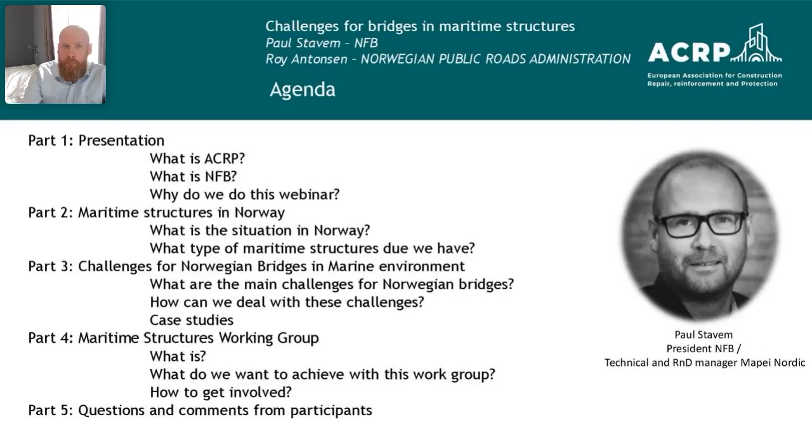So first I'm going to say some words about ACRP, which is hosting this webinar. This is a non-profit organization founded in 2020. The focus is on activities based on repair, reinforcement, and protection of all kinds of structures and buildings made of different materials, both steel and concrete, with quite close cooperation between national associations to share activities and to learn.

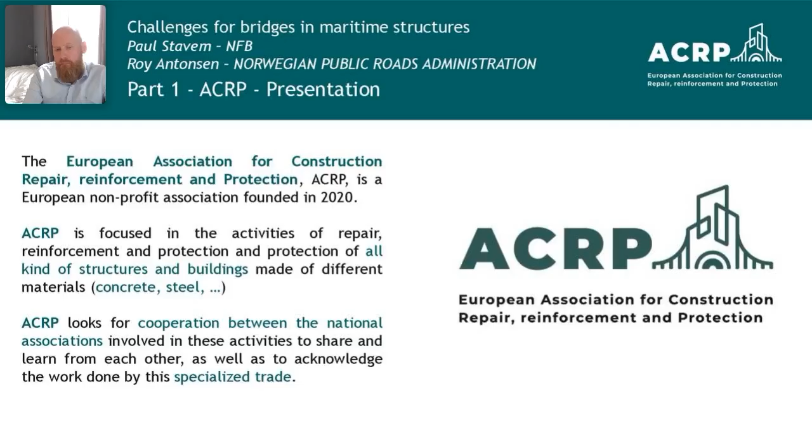The mission for ACRP is to promote the maintenance of constructions in Europe and to create a European network of professionals and information, including all national associations, but also companies like contractors, manufacturers, engineers, asset owners, and public administrations, and to try to develop the best practice, the regulations, and the trainings needed in order to have good sustainability of the structures we have.

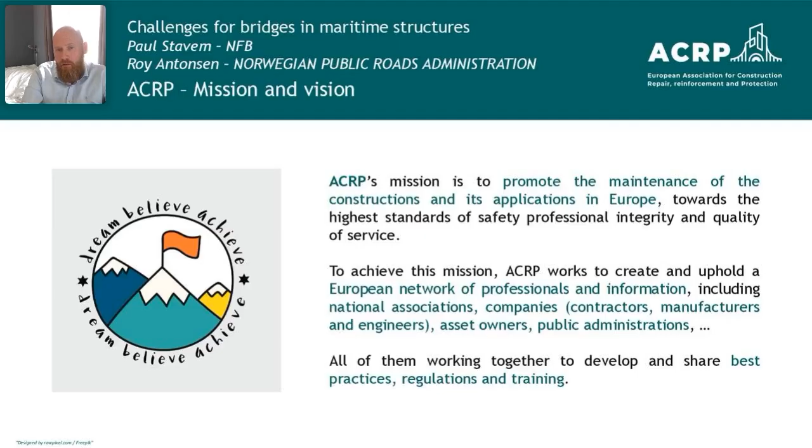So one of the goals for doing this is, of course, to alert to the importance of maintenance from a general point of view, to set up and promote European standards, to promote the maintenance of constructions with both knowledge and expertise on how to inspect, project, and execute the maintenance, and to try to work within the legislation on regular inspections, qualification on projects, quality control of the systems that are installed, and to try to exchange techniques, working methods, and trainings.

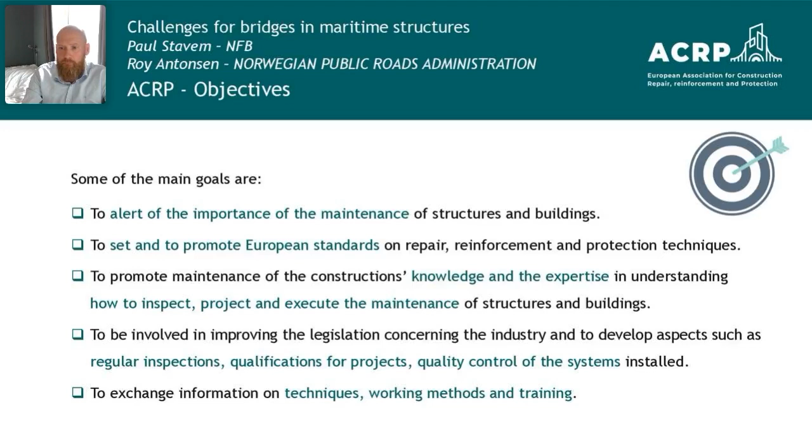ACRP is an open association where both national associations can be members, as well as contractors, engineers, and suppliers, and basically all entities involved in this type of specialized activities.

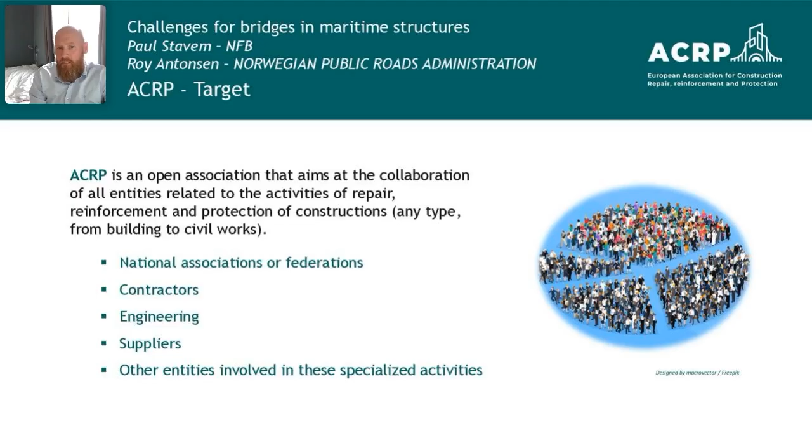The first step of this association was done in 2016 by a common interest from the associations STRRES from France and ARPHO from Spain, leading to a joint meeting in Paris in 2019 with 6 countries involved, and then to the establishment of the association in 2020.

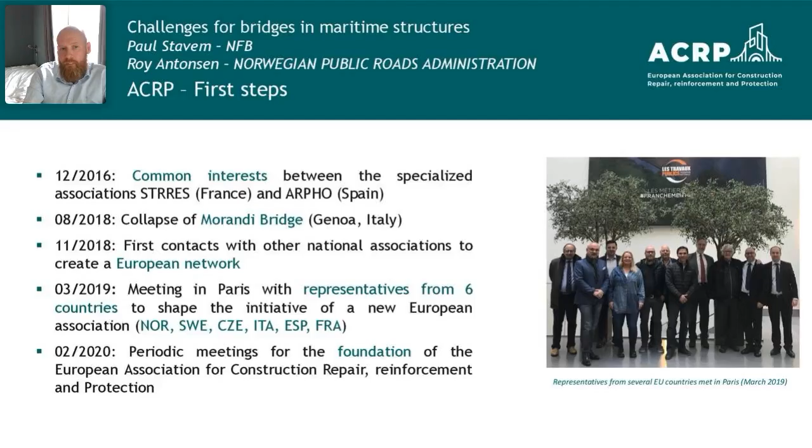The important thing for this association is to address some key points: the importance of maintenance, that maintenance is a part of the life cycle and not a problem, that there is limited knowledge and expertise in this area, and that repair, reinforcement, and protection go together, requiring a network working together.

You need a network working together with inspection, project, product, and execution, and you need to have standards, regulation, and commitment. For the general public it's unknown, and there's basically a need for specialists.

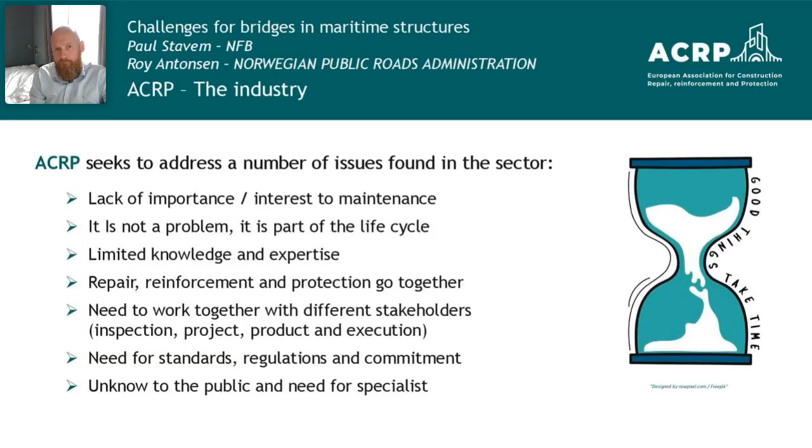My background and the reason for sitting here today is that I'm the president of the Norwegian Association for Concrete Repair. This is a similar association in Norway, established in 1990, now holding about 60 different member companies, representing owners, builders, technical consultants, suppliers, and applicators, and also some personal members.

One of the key aspects of this association has always been that the board should be elected in a way that represents all parts of the industry, both suppliers and technical consultants and engineers, but also the owners of the constructions, basically representing the whole business.

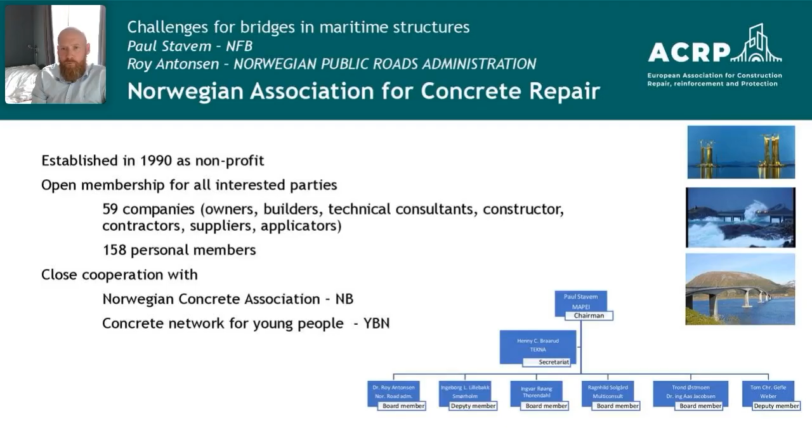There is also quite good cooperation with the Norwegian Concrete Association and a network for young people. The main activity of this association has been to arrange a meeting place for all interested parties in this specialized application area.

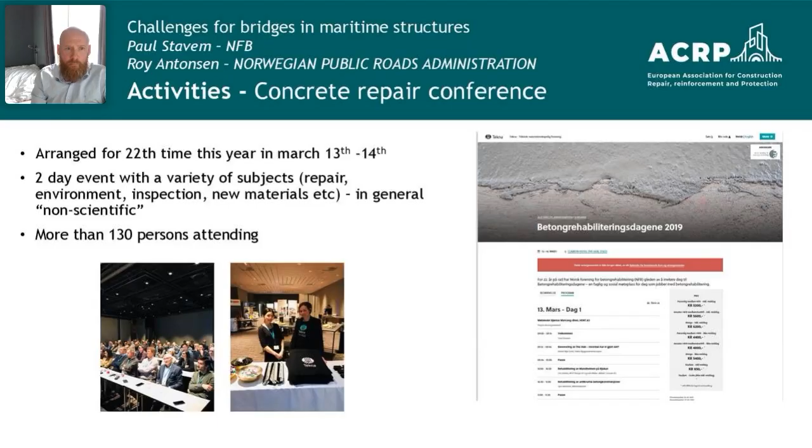One of these is a conference held every year, typically 2 days, with a high focus on different subjects like repair, environment, inspection, and new materials, generally organized in a non-scientific way, with approximately 130 people attending every year. The second important part of this association has been arranging training courses.

One of these is called R for Repair, a 5-day training covering national regulation with safety, calculation, environment, and the EN 1504 series, with an exam. Combined with training in concrete technology, this gives documented competence to perform repair and protection of concrete structures. It is arranged about 2 to 3 times a year with approximately 60 to 120 people attending.

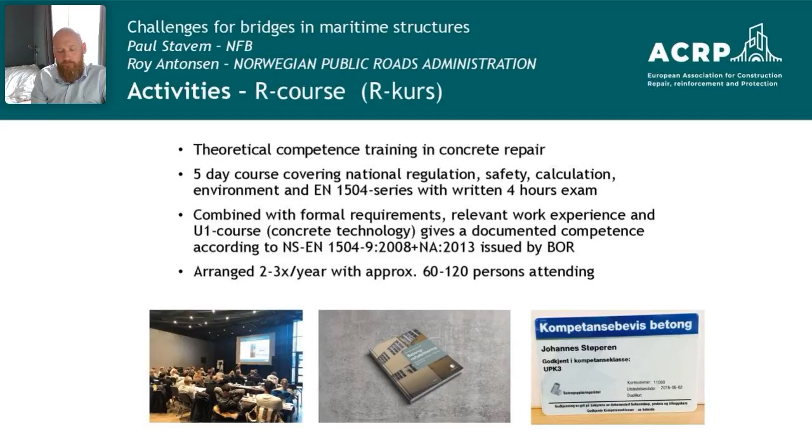The third activity is the guidelines, and this is also quite important in order to get the written best practice and be able to use this for new projects. This is a total series of about 40 different guidelines based on local conditions, experience, and regulations, typically working on areas like FRP strengthening of concrete structures, with resin-based coating, surface treatment systems, guidelines for inspections, and guidelines for instrumentation and surveillance of concrete structures. Basically trying to put together something that is best practice and state-of-the-art for this market.

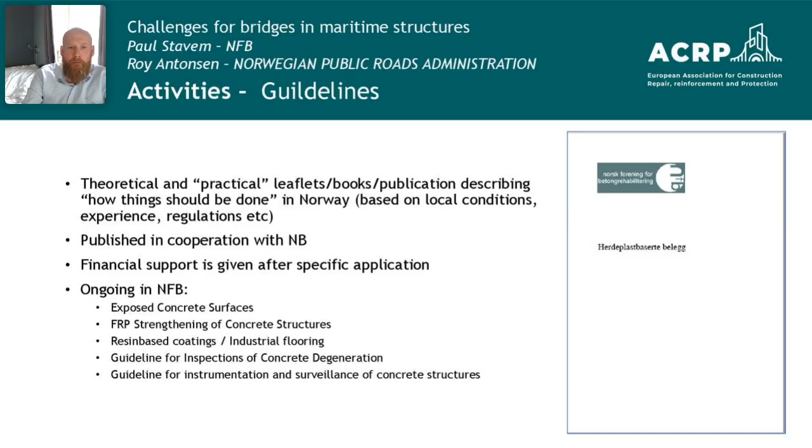That is a short summary of what the Norwegian Association for Concrete Repair is doing. And as a way of introducing the topic of the day, I'll say something about marine structures in Norway.

Some facts about Norway: we have a population of about 5.3 million people. That's not a really big country in that term. The area is about 385,000 square kilometers, which is about the same size as Germany if you compare. So it's a quite less populated country.

What has been important in Norway is the coastline, which in total is about 101,000 kilometers. This is actually the second longest coastline in the world, only beaten by Canada. This coastline has been, for many hundreds and maybe thousands of years, very important for different industries. I'll give you examples from the oil and gas industry, transport, and also fish industry.

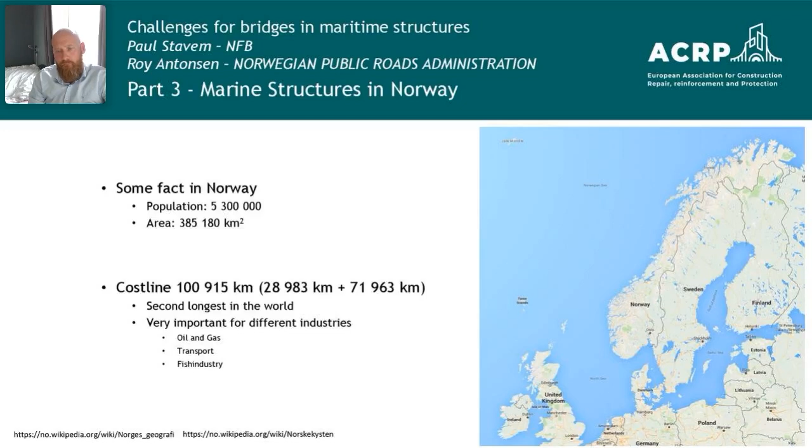Oil and gas is an industry that started in the North Sea around 1970 and resulted in the building of some quite large concrete structures from 1975 to 1995. In total, 15 were built, called Condeep. If you look at the picture here, you'll see a bit of how this is made and its size.

These typical structures—if you take Troll A from 1995 as an example—are about 1.1 million tons in weight. The height is about 472 meters, and they are placed at a depth of 303 meters.

What's a little special about this, in terms of protection and maintenance, is that it was built with a strategic repair and maintenance philosophy: designing concrete with a very low water-to-cement ratio, increased concrete cover, and also, as you see in the photo, using protective coatings in order to protect it. The obvious reason for doing this is clear when you look at the photo of how to do the repair—you need to do this by basically climbing, and of course the cost and difficulty of doing this is quite significant.

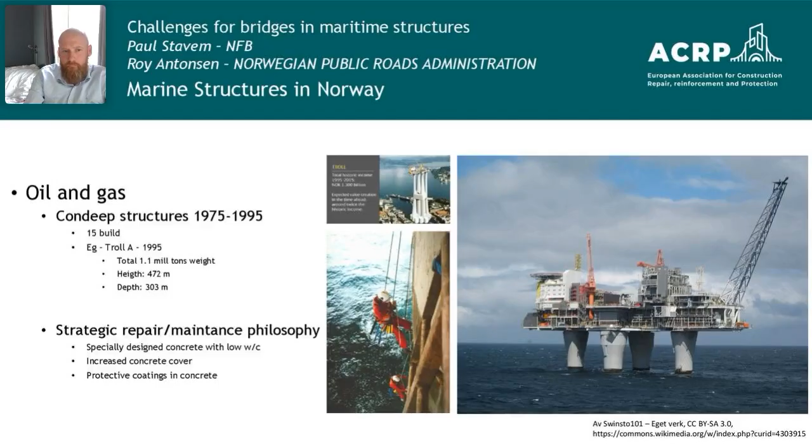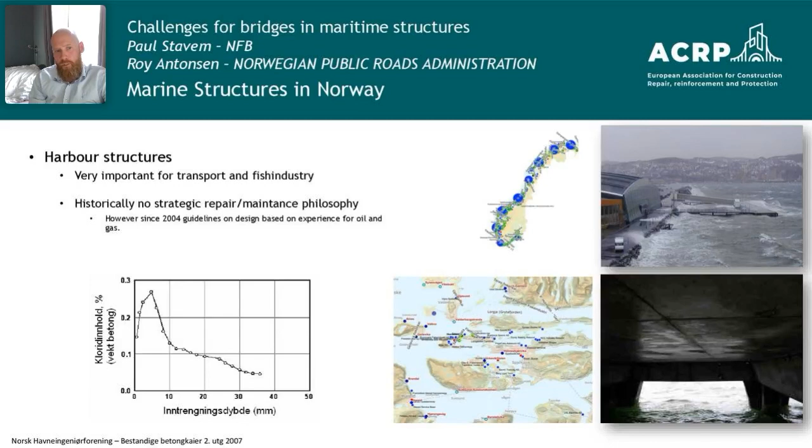The third type of structures are the bridge structures, which Dr. Antonsen will talk about in just a few minutes. Like the others, these are quite obviously important for transport and the fish industry. For this part, the Norwegian Road Administration has done enormous work to investigate the bridges and understand both the mechanism and the exposure. There are a lot of reports actually showing the microclimate and exposure on the bridges compared to the exposure of the sea.

And I think for this one, I'll give the word over to Dr. Roy Antonsen, who will speak about the bridges in Norway.

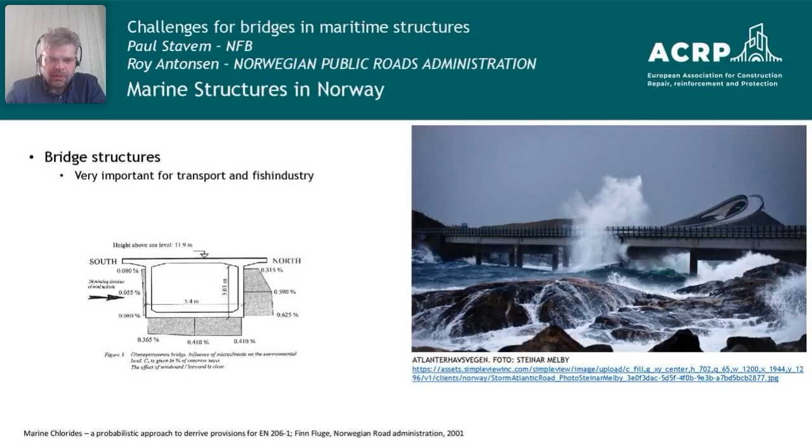As Paul mentioned, I work in the Norwegian Public Roads Administration, and I work within a department where my colleagues and I are very much hands-on.

We go into each of our projects starting from assessment of the bridge's condition, and we describe how to repair these bridges, either by concrete repairs or cathodic protection. Damage can come from alkali-silica reactions and so on. We describe how the rehabilitation will be done, follow up through the whole construction period, and finish the projects with documentation. Sometimes we also follow the rehabilitations afterward to document the lifetime of the repairs and how to improve future repairs. So we are a team working very much hands-on.

Some of these slides that I made today contain a lot of details. We won't have time to go into all of them, but I've included the slides anyway, because people in the audience sometimes like to look at them after the session is over, and there will be details giving more information.

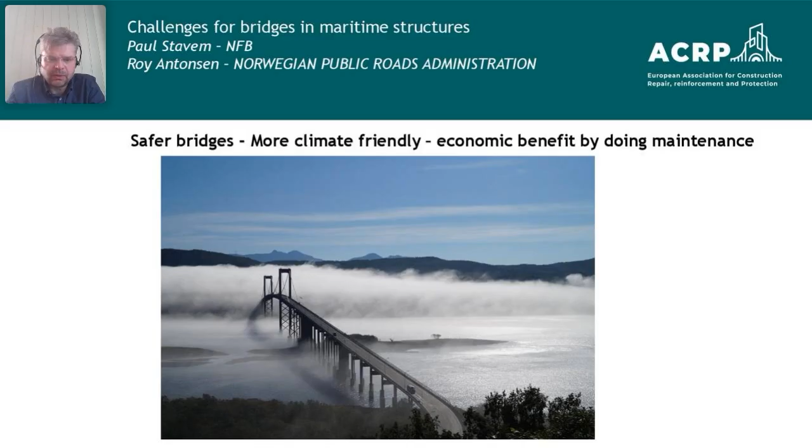Let me start to talk about safety. This one seems very tough - I'm saying straight out that our inspections are not good enough.

Normally in Norway we have very good routines for doing main inspections and documenting the safety of our bridges. But there is one thing we were never good at: investigating corrosion within post-tensioning tendons. Sometimes there will be voids inside the ducts where these post-tension cables are, and we are not very good at examining and documenting this. I will show you a good example of this further in the presentation.

About cost, I'm saying that we save billions by doing maintenance and rehabilitation of concrete bridges. Why? Because in the 60s, 70s, and 80s, a lot of bridges were built in Norway using other concrete standards and other methods than we have today. The concrete standards back then were not very good, and the concrete cover was typically only 20 to 30 millimeters, built in Arctic coastal environments. Of course, there were chloride ingresses.

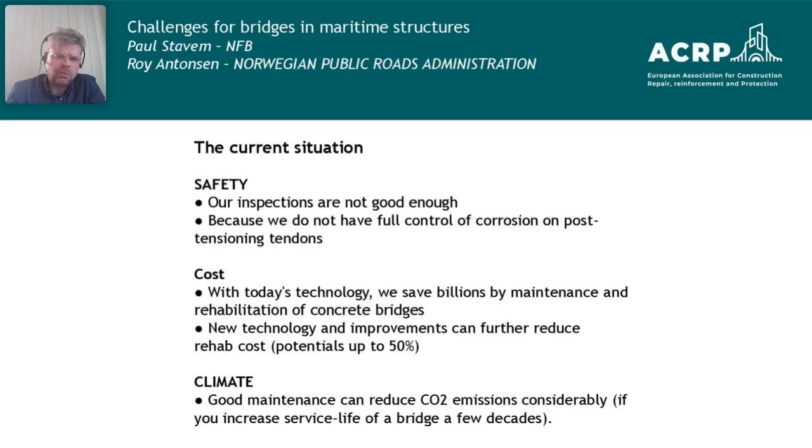Because there are so many of these bridges built with a poorer standard than today, it's very important to rehabilitate them and keep them alive, because building new cross sections or replacing them with new bridges would be very expensive. And it's not only about money - it's also about the climatic gas emissions from producing cement, transport processes, and all these things. So rehabilitation is extremely important in Norway for concrete and steel bridges.

So I will go on and talk about safety. This special bridge, Herøysund Bridge, I thought in the beginning was going to be a simple project, because I designed a cathodic protection system for this bridge based on conductive painting. The bridge was 100% utilized - you can drive a 50-tonner over this bridge, but that's also the limit. Its load carrying capacity is 50 tons, and it was 100% utilized. So I designed a CP system based on conductive paint because it's not heavy.

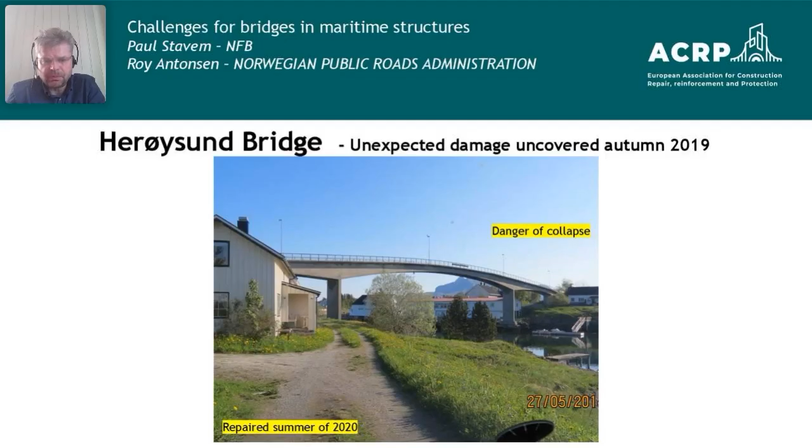So we were going to rehabilitate this bridge, but during the autumn of 2019 we got a surprise. Now I'm going to show you that surprise.

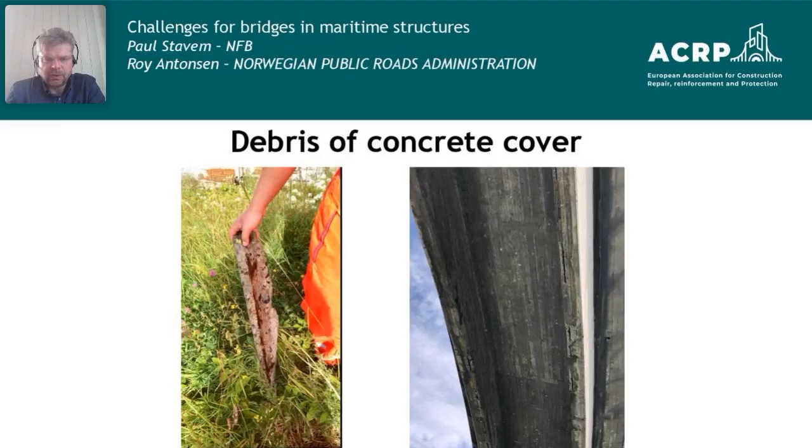Let me just repeat - the purpose was to install cathodic protection and also repair the concrete cover because of falling debris. Here is an example of that: about 10 kilos of concrete debris from this concrete cover spalling, loosening, and falling down into the grass where people are walking under the bridge. Very dangerous, so we had to repair this bridge.

But here is our surprise: once we started doing surface treatment of the bridge, because we were going to apply the conductive paint...

It's very normal that we find delamination on coastal bridges in Norway because of macrocell corrosion. But what happened here we never saw before: about 100 kilos of concrete just fell out from one of the beams in the bridge, revealing a steel box which is actually the anchors of the post-tension tendons, jointed inside this steel box. I think this box is called a coupler in English, and it was totally revealed because of the concrete falling out.

We went to see this immediately as it happened, and because we have a lot of routine inspecting damages on bridges, we could see that this delamination didn't occur recently. It has been there since the bridge was built. The surfaces here are dark and carbonated, and this is old concrete surface.

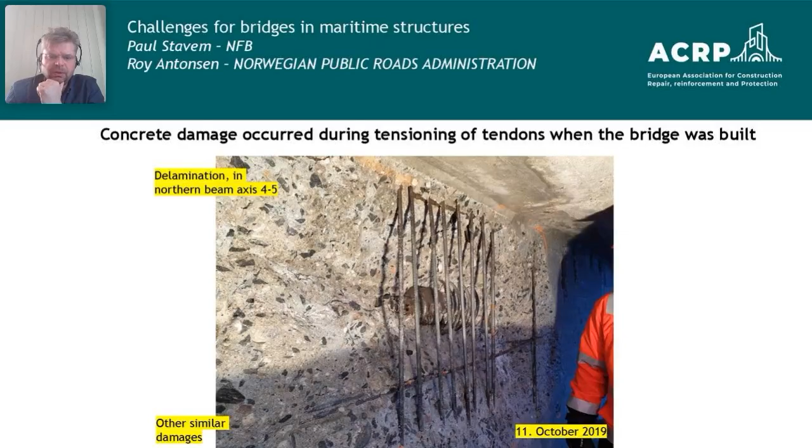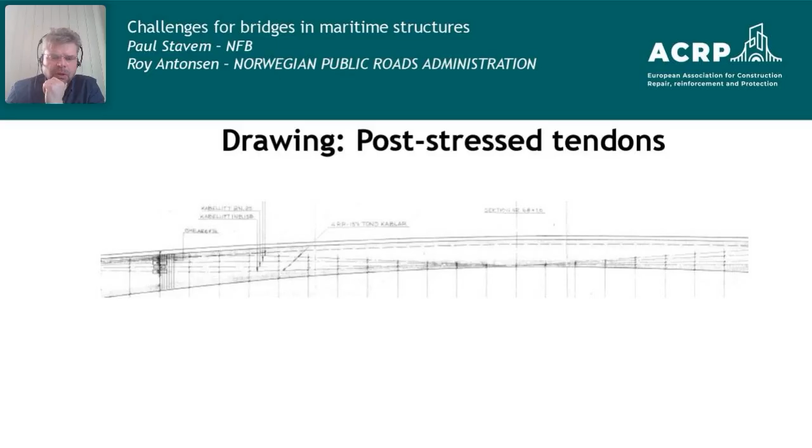As I'll also mention, this bridge looks like a cantilever bridge, but it's not - it was actually built on formworks in 1966.

Also important to notify you that MOWI, which is a salmon producer in Norway, has a very large salmon farm by the bridge, and they do about 40 crossings of heavy traffic every day, transporting fresh salmon out to the world, exporting it. So this bridge has a key function for the infrastructure in this society - this is on the coast of North Norway.

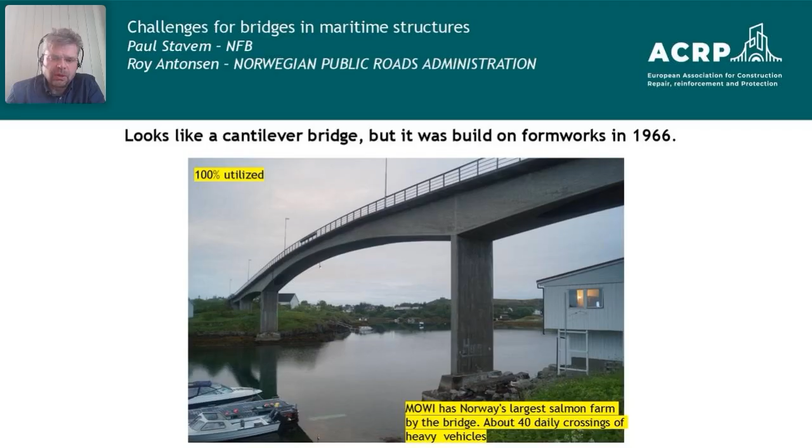A key factor there, and it was very important for us to examine immediately these non-grouted ducts we found. Here's the fiber optical analysis, within that steel box I showed you, that was not grouted. This fiber optical inspection showed first only surface rust on the steel wires, but it gave us the first concerns that maybe there are other places inside this bridge where we have voids, empty spaces, and corrosion of the tendons.

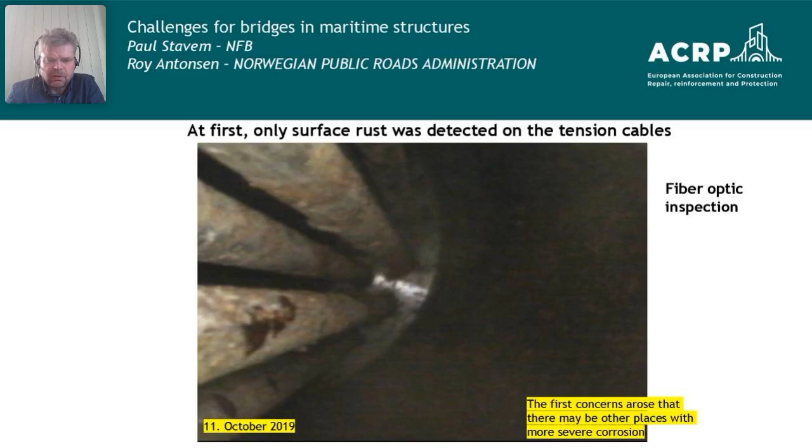It's hard to inspect these tendons - I'll show you later, here's another one. You can see the ducts, and the tendons are inside the ducts that are pre-stressed. It's hard to inspect them because these are metallic ducts, and there are only a few methods available which are non-destructive to inspect such voids.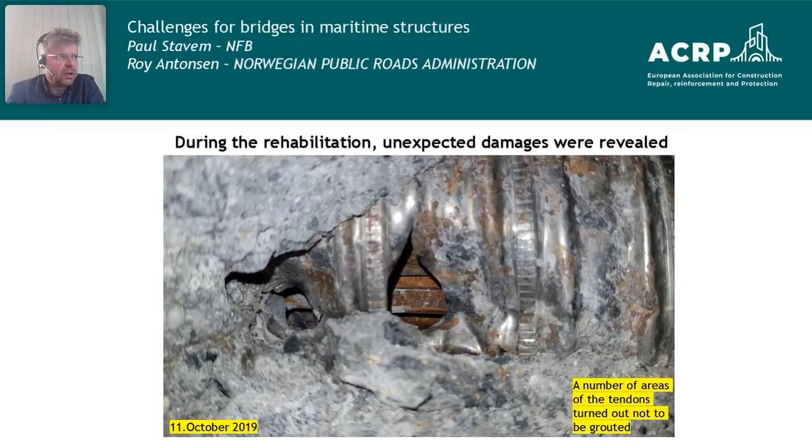As we went along in the project, we found more and more of these voids, and we had to change our plans. It was no longer as we had considered - we had to stop our plans about installing cathodic protection, and rather think about strengthening the bridge.

The case is that we found more and more severe damages - as you can see here, this is severe corrosion, gravrust as we call it in Norway. You can also see that the tendons here are partly enclosed by a very humid mass, which has been analyzed in laboratory, and it's a mixture of partially injected grouting, cementitious mass that has frozen over the years, and very small particles.

We only found small traces of chloride and sulfate inside here. But this void you're looking into, we have removed the duct here. So originally this happened inside a closed duct, and there was enough humidity there to sustain corrosion, and enough air also. The corrosion mechanisms happening inside these ducts are completely different than the ones we're used to on coastal bridges, where you have chloride-induced macrocell corrosion. These are completely different corrosion mechanisms occurring inside there.

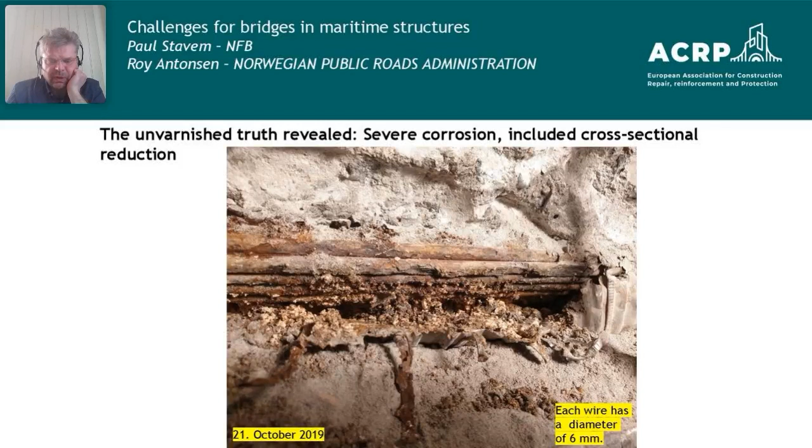We now have a collaboration with the university in Trondheim, and we have master theses being written on these corrosion mechanisms as I'm speaking now.

So let's go on. Here is the area that has been cleaned from all corrosion deposits, and you can see that the cross-section reduction of these steel wires is about one-third.

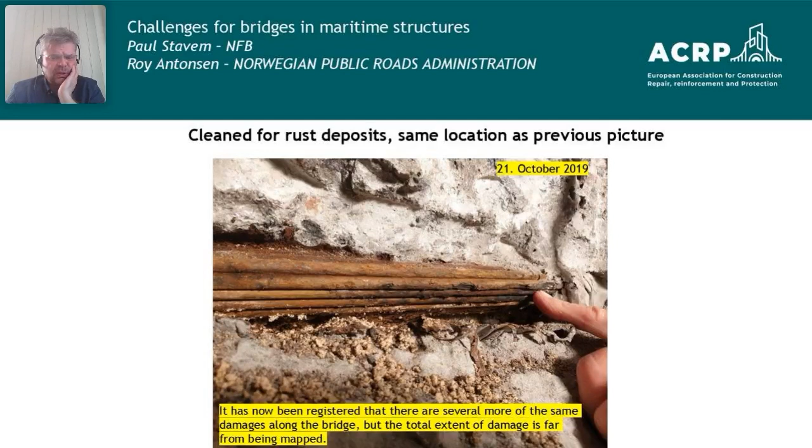And of course, we started getting afraid. Why should we think that this is the third or fourth place we opened the bridge, and that we found the worst place? We knew there had to be places even worse. So we kept going in the project.

Found this one too. And because the bridge was 100% utilized, we became worried, because there is actually no reduction margin left on the cross sections of the tendons, and no margin for lack of interaction between the tension cables and the concrete either.

So this group of specialists that was appointed there had a hard time doing the calculations, verifying that we were still within the safety margin on this bridge.

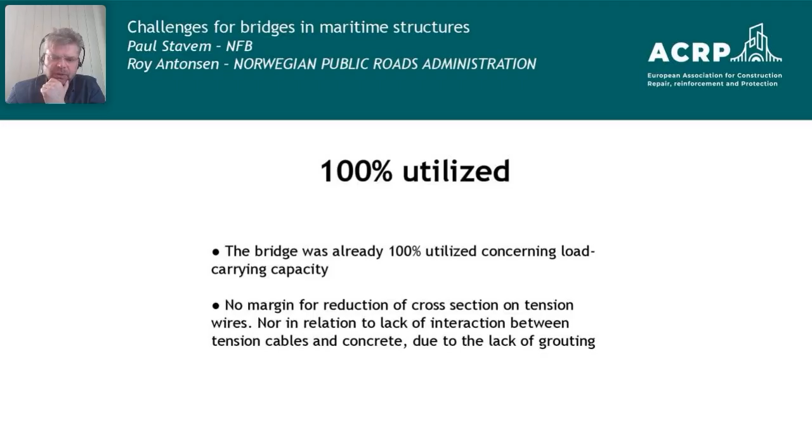So the static calculation showed that the bridge had to be strengthened, had to be monitored, and the remaining lifetime was only set to 3 years.

And then Nordland County, which owns the bridge, now had to build a new bridge. This time the Norwegian Public Roads Administration was too late with the rehabilitation, because our inspection routines were not good enough. It's usual that we are a bit late rehabilitating bridges, but that's usually because of lack of funding. This time it was because our inspection routines were not good enough.

Notice also that the price tag for a new bridge is 220 million NOK, while the rehabilitation project had a budget of 13 million, and this is usual. We normally enhance the lifetime of bridges by about 30 years when we go in and do full repairs of them, usually for a price tag that's just about 10% of the investment cost for building a new crossing. Just 10% to increase the lifetime by several decades - very interesting because of the economic benefit of doing rehabilitation.

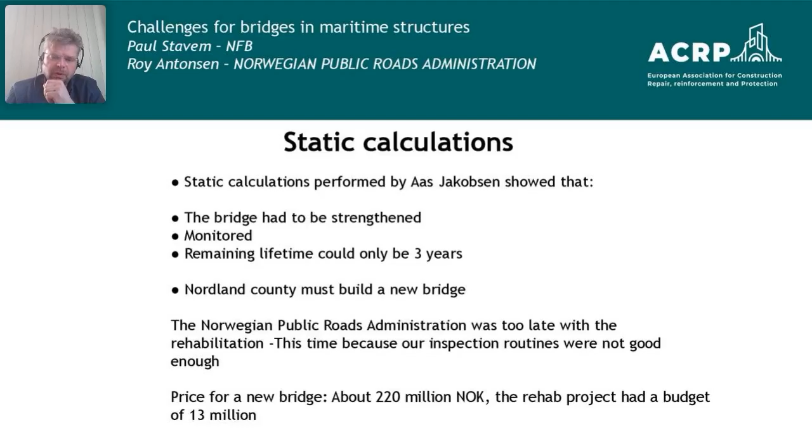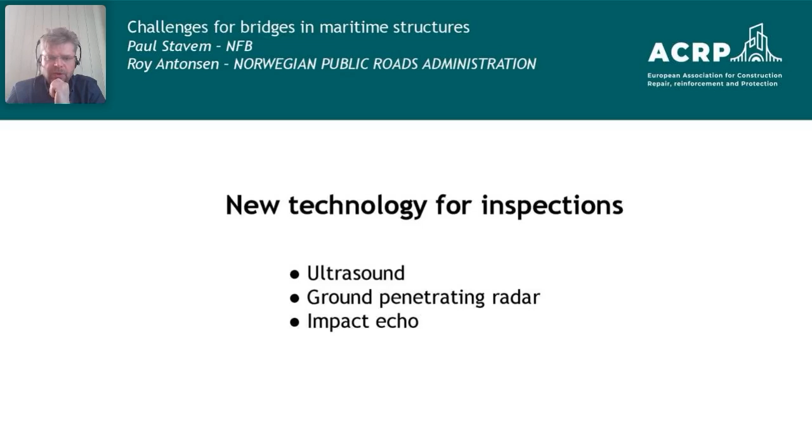So let me talk about the inspection methods. We have ultrasound, ground penetrating radar, and impact echo. These three combined are good to detect voids inside concrete ducts.

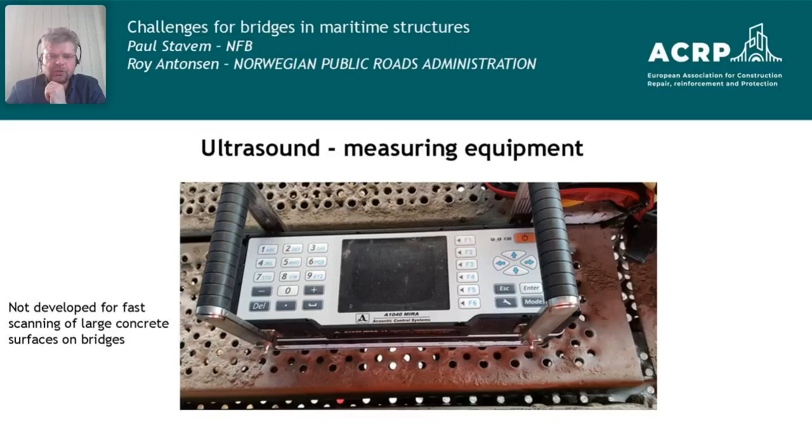And here's an example of ultrasound measuring equipment. This one here is not. There are some units now that you can get that scan the surfaces, but not combined with ground penetrating radar and ultrasonic together - but you have this scanning equipment available now.

We have got the funding in Statens Vegvesen, the Norwegian Public Roads Administration, to carry on a project called VESPA. We have the funding now to help develop this kind of equipment, and also to map a lot of other bridges in Norway, and to establish the routines necessary for inspecting these voids.

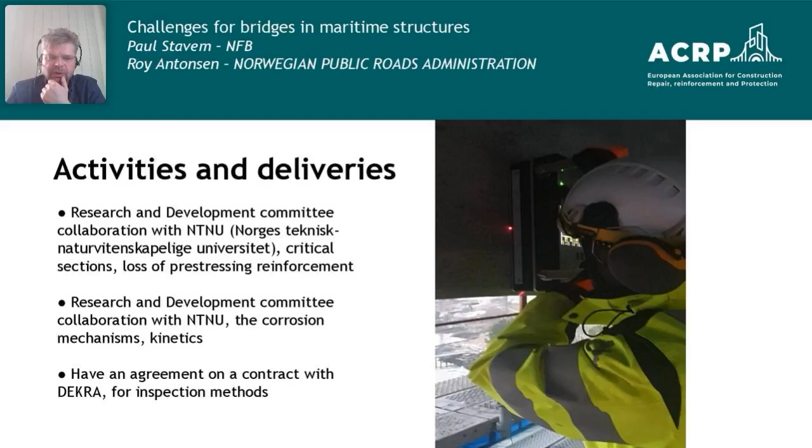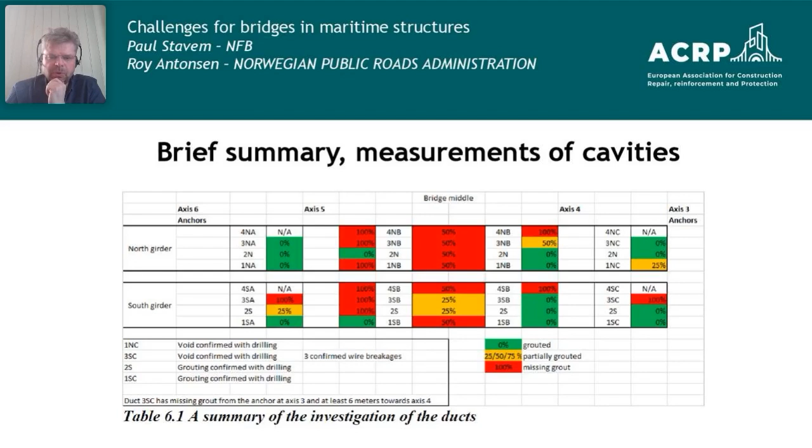So it's easy to do, we have the equipment, but it's not easy, it's very tedious to do this examination. Only these measurements here took a whole week of work. And I'm not talking about a normal working day, I'm talking about 12-hour working days for a whole week to get these results. It took a long time also to analyze the results.

But they were verified, as I will show you later. The conclusion from this work is that the measurements combining ultrasound, ground penetrating radar, and impact echo together are suitable for locating cavities in the ducts. The methods need to be developed for faster scanning of larger surfaces, and all the measurements in the critical section showed varying amounts of cavities in Herøysund Bridge.

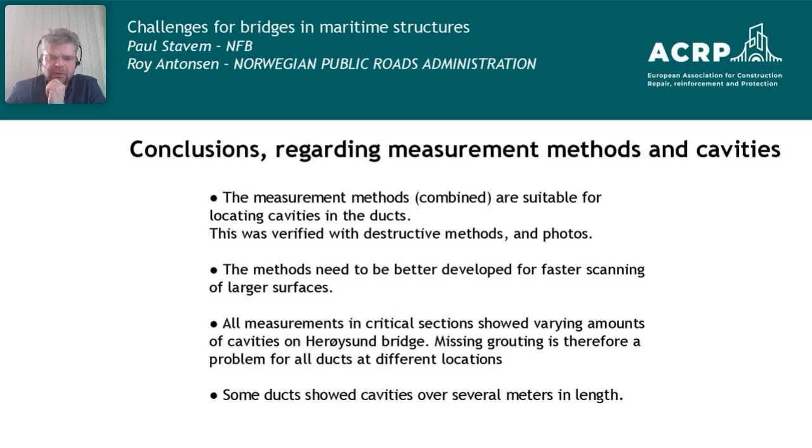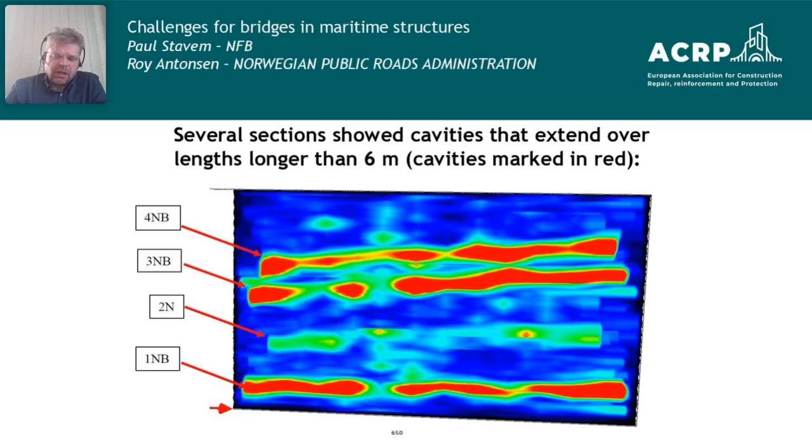Some ducts showed cavities over several meters in length, as this one. This is 6 meters in length here, and you can see that the red areas are totally voids. Very scary results we found there, and therefore when we verified the results, we actually took a 32mm drill.

We drilled straight right onto the tendons. We would never do this because we're always afraid of damaging the tendons, but this time we had to verify our measurement results. As you can see here, this is like a red zone of ours - we measured the ultrasound and all these things saying it was empty, and it was empty. So we verified the measurement methods, and notice also that we did not damage the tendons inside. There's a lot of corrosion in there, and therefore we verified our suspicions on the voids there.

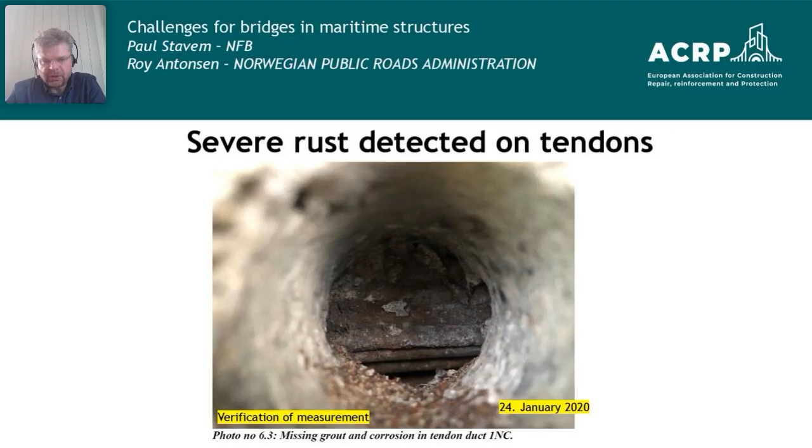Remember that these are post-tensioned tendons, right? So there's a lot of force on each of these steel wires. You cannot move them. But what we did here is put a screwdriver in there - you cannot see the screwdriver, but we applied some force on these steel wires. We wanted to see if we could move them, because we were afraid that there were some fractures on them due to corrosion. Now, Anita, you can start the video.

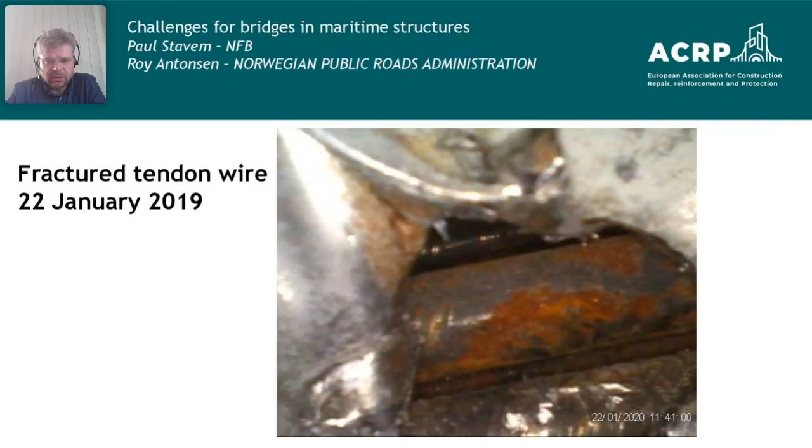And this is what happened. So this one here is broken. Yeah, you just know it's broken. So notice also there are no non-destructive methods for mapping the extent of corrosion inside. We can measure the voids, right, but not the corrosion.

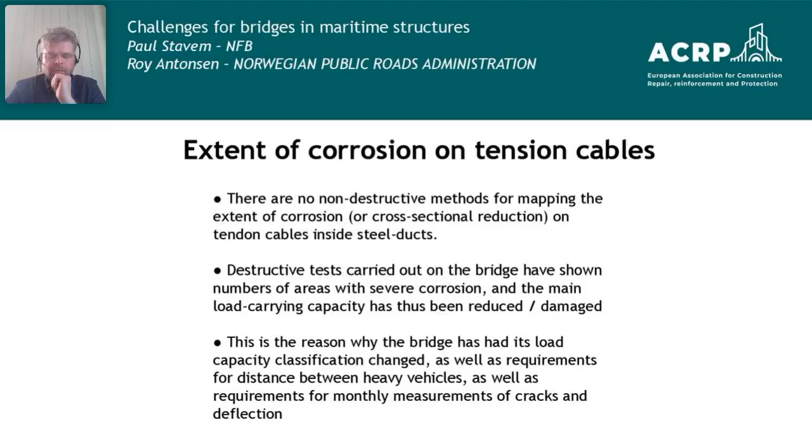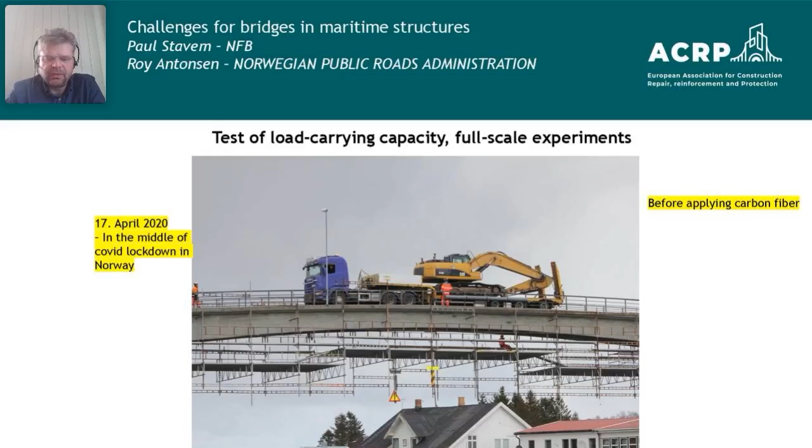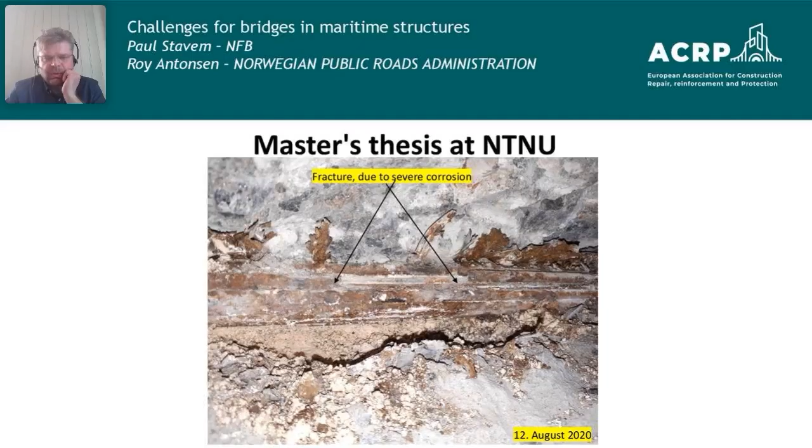So we were within the safety margins, but because of the corrosion there, we decided - here you can also see we found later the corrosion cracks, or actually the threads have been totally corroded away. These are scary photos, but still we were within the safety margin of the bridge, deciding anyway to strengthen it. So here's the carbon fibers that were applied, and for those interested, you can see the details on the design of the strengthening systems.

I will just show you how we applied the carbon fibers under the beams here. It was glued on with epoxy. So this is a safety precaution for the remaining 3 years of the bridge, but the Nordland County still has to build a new bridge here because of the ongoing corrosion in the main carrying system of the bridge.

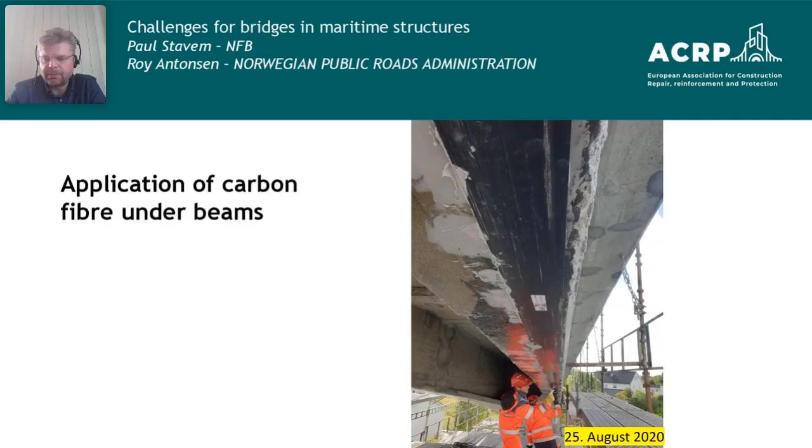So what needs to be done now? The project I mentioned that got financing from the Public Roads Administration - what we will do is try to help the market develop these measurement methods. We have set a time frame of 2 to 3 years on this project. You need to map a lot of bridges and set some priorities. Luckily in the UK they have done a lot of work on this before - there's a good standard, a UK standard, showing how to help prioritize when you own a lot of bridges, to assess these structures and give you a priority list on where to start.

We estimate that we have to do condition surveys on like 300 bridges over the next 10 years, with respect to cavities in the ducts. And of course, when the Herøysund Bridge is demolished in 3 years, we would like to open further places and study the corrosion inside there. We need to understand the mechanisms.

For those of you working with electrochemistry, you saw that the tendons were partly enclosed by this humid mass. You would also know that there are different options on how corrosion can occur when only partly enclosed by a mass like this, in humid mass.

We also have some suspicions that there might be corrosion due to what's called, not embrittlement, but spänningskorrosion - I will say that in Norwegian. I'll come back to that. So we need to keep doing static calculations and check if it's possible to repair these kinds of damages.

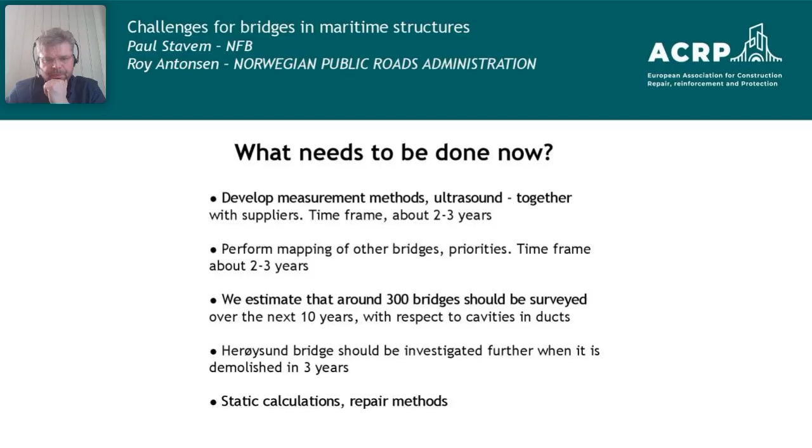I will talk a bit about cost also.

Now we go straight to cathodic protection, and this is Sortland Bridge in the north, also in Norway. I usually refer to this one as the crown jewel of cathodic protection in Norway, because it was the first bridge being rehabilitated by this method. At that time, they did a lot of right things - they were actually excellent. The white fields on each of these pillars are cathodic protection by a titanium mesh and sprayed mortar.

This CP system is soon 30 years old, still running, and the values are very good. The only thing we have started losing is the reference electrodes - they are near the end of their lifetime now. We are going to put in new reference electrodes and keep on running.

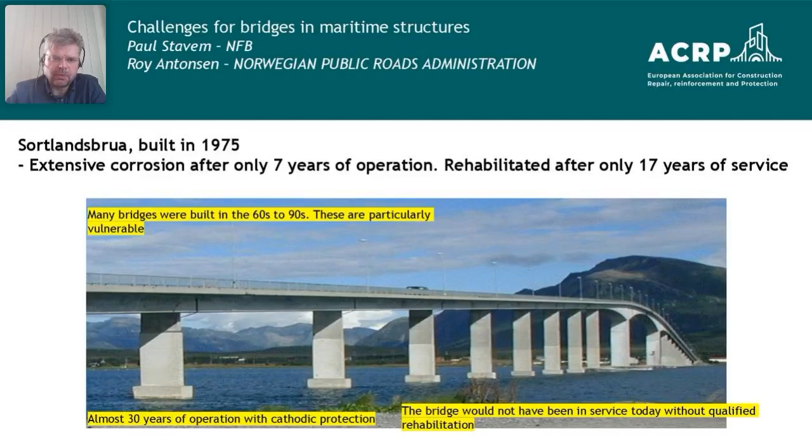This CP project has been astonishingly successful. There was a lot of corrosion damage on Sortland Bridge, and only after 7 years of operation - we can clearly say today that this bridge would not exist without being cathodically protected. It would not be there. So this is a 30-year-old project.

Now I'm going to show you a new one. This is Breisundet Bridge in Lofoten. I suppose a lot of you in the audience have heard about Lofoten - it's a pearl of nature in the north, and a lot of tourists visit this area every year. We finished rehabilitating this bridge in 2017, completely new and modern cathodic protection system. We are very proud of this one.

The reason I show it here is that we calculated this one, Breisundet Bridge, and its sister bridge, completely the same design, just 100 meters away. These two bridges we rehabilitated for like 50 million NOK, and it was also estimated at that time that building a new crossing there would be 10 times higher. So we stayed within 10% of the investment cost of building new crossings. We take care of these old concrete bridges - this one was built in '82.

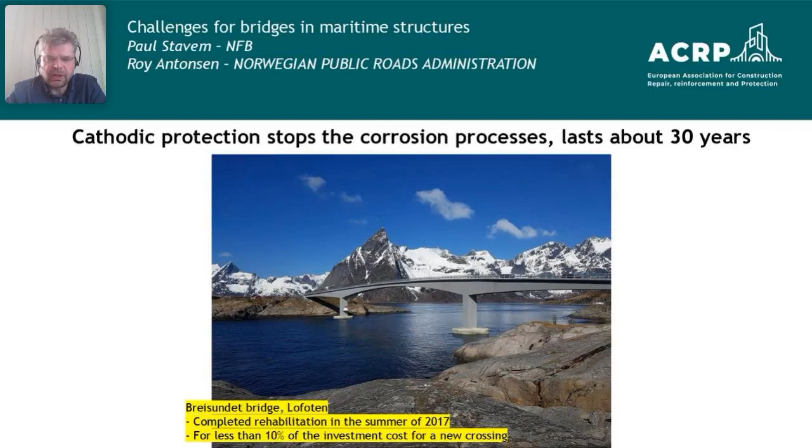And then we have Måløy Bridge here, which is the biggest cathodic protection system in Norway - we have like 23,000 square meters of cathodic protection installed here. This project will finish this summer. It's also a good example that we are able to protect these bridges and take care of them, even though they were built with bad concrete standards in the 60s, 70s, and 80s. It's totally possible to maintain them for decades.

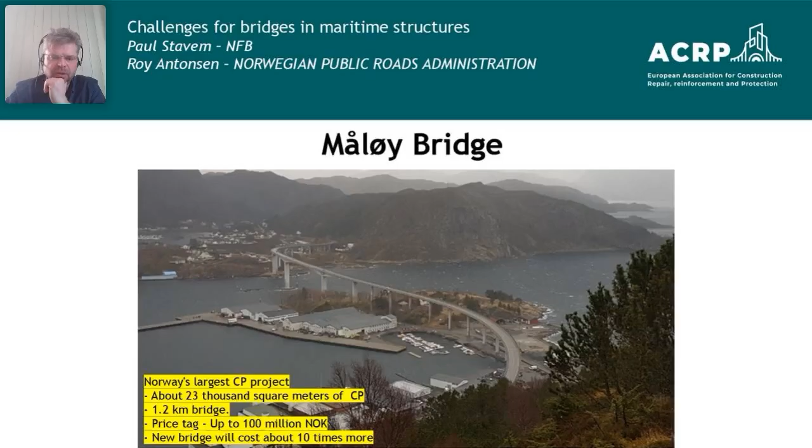I mentioned also that there is some new technology on the way, the conductive painting, where we also expect to have additional cost reductions on cathodic protection systems in the future.

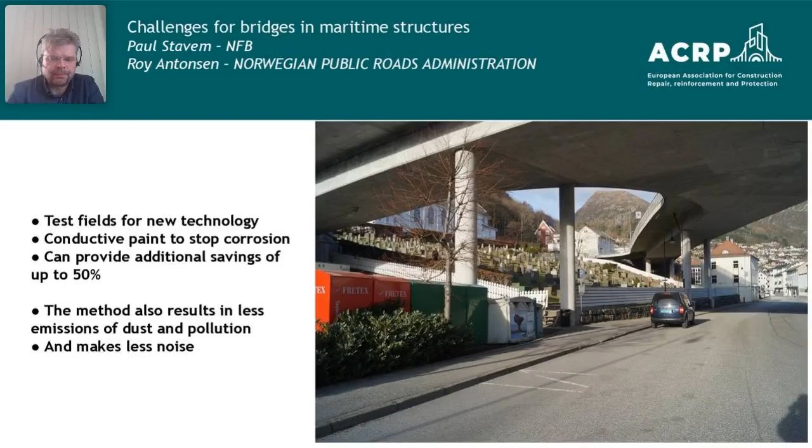I'll also talk a little - I just mentioned the climatic gases. I don't have numbers yet, but we have established a new project on this. It's simple mathematics, right? We reduce CO2 emissions a lot by rehabilitation. What we're going to do now is case studies on several bridges in Norway - we're going to rehabilitate them and do all the calculations on how much we save on CO2 emissions by doing rehabilitation. We have been very good in documenting the money saved, but not the CO2 emissions so far.

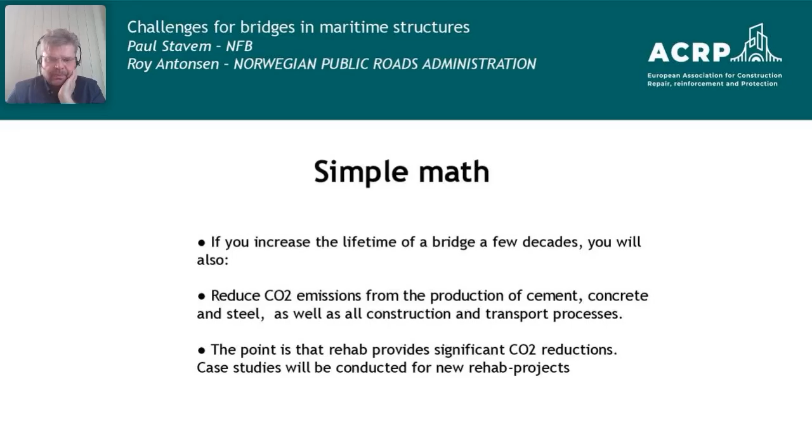But this will also be taken care of in the coming years, and for those of you interested, you can just contact us at the Public Roads Administration, so these numbers will be officially available for anyone. Okay, I think I'll stop there.